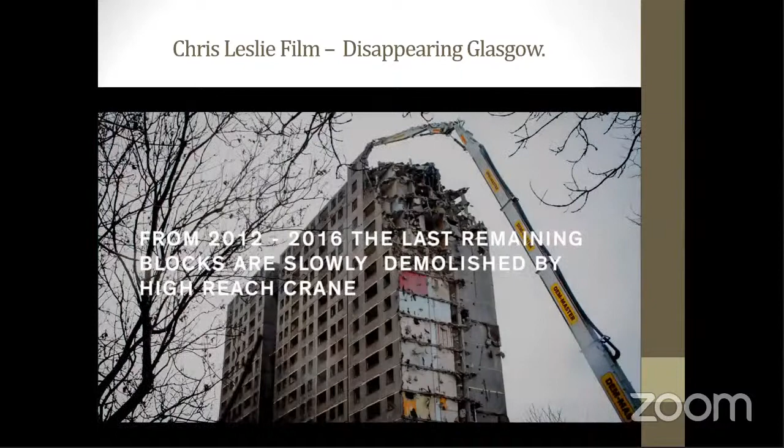Things probably started to decline when you get into the 80s. For me, a pivotal moment was, and it seemed as if it almost happened overnight, round about 82, being 16, and heroin becoming really commonplace, and folk coming into the scheme who were drug dealers, and your mates getting involved in it, people getting ill because of it.

And then gradually a lot of the old people were dying as well, or moving away into care homes, and they were being replaced, I have to say, with people that were single person households. A lot of unemployment as well. At one point in the morning there was no point in waiting in the lift because they were so busy with folk going to work, and then by the 80s that was not the case, so people were coming and going. It was very much a transient community.

So I think what happened was you ended up with an estate that became very much a sink estate, and that's the way it was looked at by the council. For me, it became crucial to move out of Sighthill once I became a parent. Before that, it was somewhere to put my head. I knew everybody. I knew the good people, I knew the bad people, and I was quite streetwise, but the thought of bringing a child up here was not something that I relished at all.

We had issues with drug addicts in the block, going out into the landing, and there was people in the landing hitting up, and it just wasn't somewhere that I wanted to bring up a child. So for me, the main goal in life was finish uni and get a house elsewhere to get him out. I've got mixed feelings about the buildings coming down.

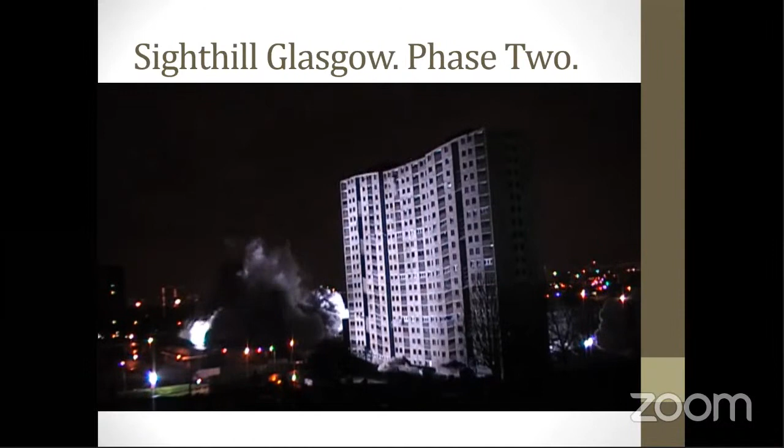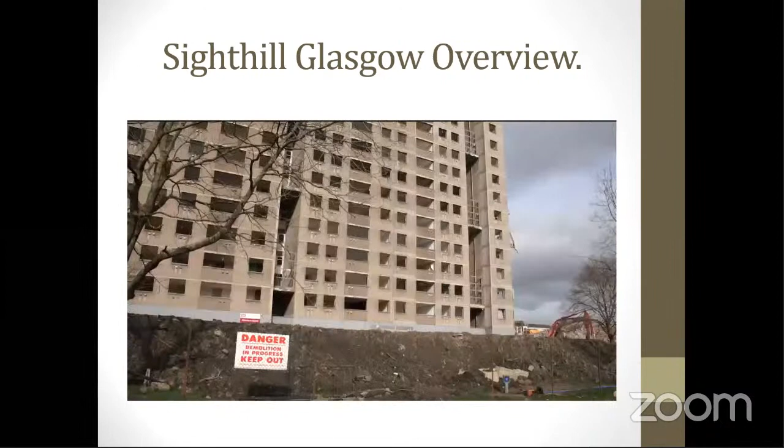The one thing we are good at in Glasgow is making dust, as you can see. My name is Kelly O'Rourke. I'm the Resident Liaison Officer for Technical Demolition Services. Technical Demolition Services have been employed by GHA, who are working alongside Glasgow City Council with the regeneration project here at Sighthill, and we've been employed specifically to take down all of the high-rise flats that have been situated here for many years.

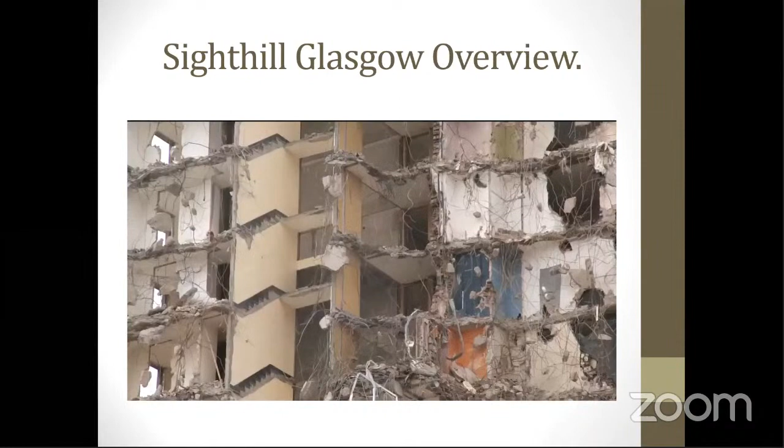Obviously, it's not just a case of when you're demolishing that you just start taking the building down. There's a lot of internal work that needs to be done first. So we would employ our staff to go in and basically gut every single room and part of the building out. This is everything: skirting boards, cupboards, light fittings, smoke alarms, anything at all that we feel would be a danger or a threat while we are demolishing. That is quite a long process, but most of the stuff that we take out of the buildings is actually recycled.

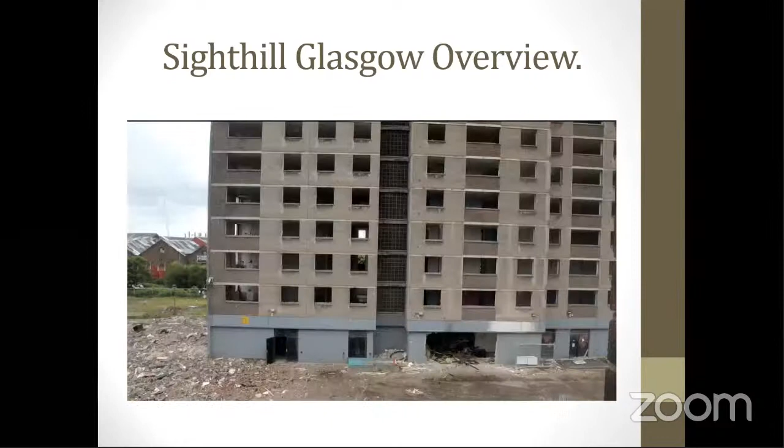The last thing we take out is the windows, and we do that specifically so that when we are taking out everything within the building, we try and keep the dust and noise contained within the building so that we're not disturbing any of the local residents. We're using a method with the super high reach machine, which is one of the largest super high reach machines in Scotland, and basically you work from the top of the building, working your way down in sections, taking chunks of the building out with the jaws of the demolition machine.

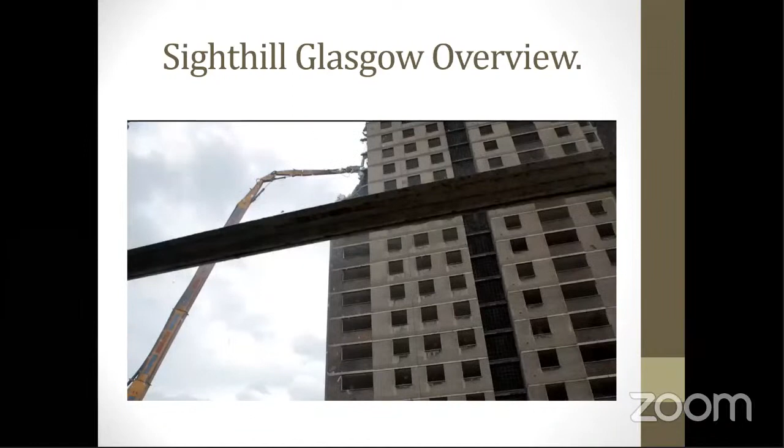Well, my role specifically is what it says, it's to liaise with the community. So that would be the local facilities, the schools which are nearby, church, any of the local residents meetings, any meetings with the local contractors, Glasgow City Council, GHA itself. So I would be a person who people would come to if they have any questions, queries or any issues that they want to raise.

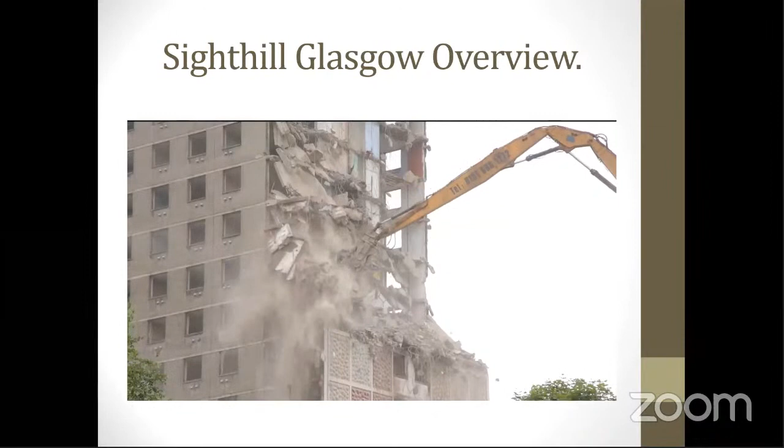We are thinking that demolition work will be completed in October. That will be completely finished here, so that's not just the demolition of the buildings, it'll also be the groundwork which we're employed to do before the other contractors come in. So the initial ones were done with explosives alongside the rail line. As we moved away through the estate, the rest of the towers could then be done with a high reach machine.

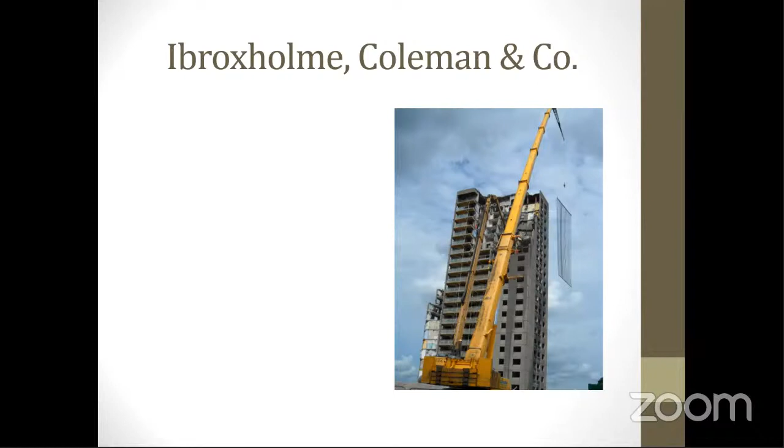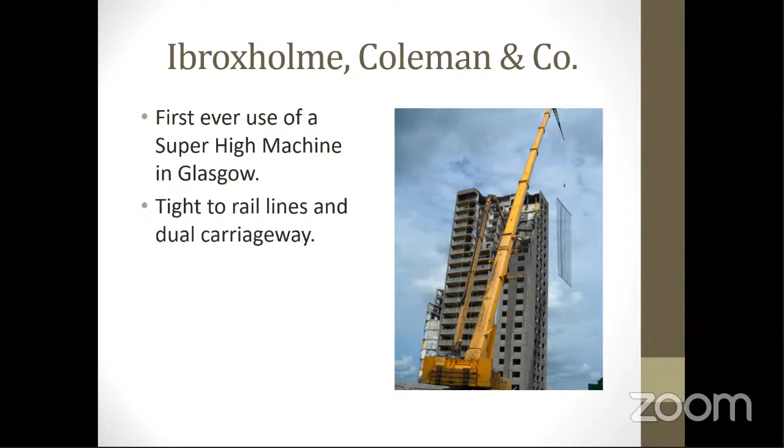And that's really made of light mesh reinforcement, which means that anything that ejects from the side of the building when the machine is munching hits the screen, which prevents it going into the dual carriageway, which was quite close to that. So first ever use of a super high reach. Very tight to rail lines and a dual carriageway, so its own problems which we had to solve. And as I said, the crane's holding the demolition screen.

Stayed with Coleman then to do Riverford Road. This one is again an explosive demolition. The tower on the right of the photograph there, you can see, has had part of it removed by crane and small machine, because of the proximity to a local school. It was within 15 metres of an infant school that had to stay in place. So we took a slice off the building all the way down and then left it for blowdown.

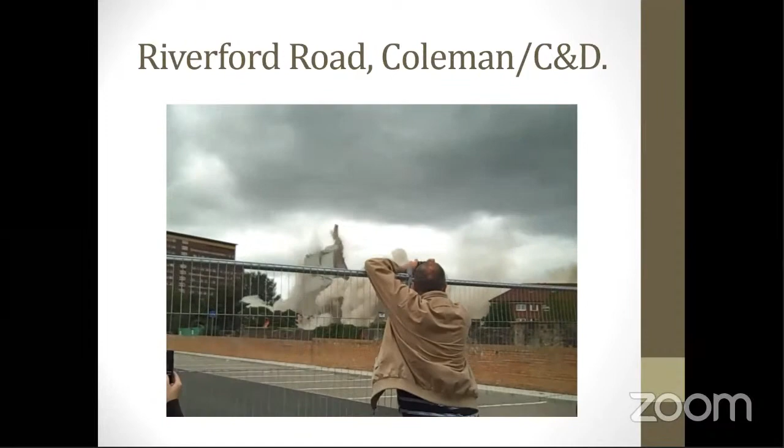Different sort of explosion you saw on that one, a different choice of blasting technique, because those towers had got very heavily reinforced lift shafts in the middle. We then went with high reach when Dem-master got involved with their super high, as well as TDS's super high. This is Demolition Iona Court.

And what we do here is use the high reach machine to munch away. So he's got a jaw on the top of that machine, which pulverizes the concrete. Water is fed up the boom of the machine to keep the dust down, and he just works away nice and steady. The driver has got a reclining seat, and he can look at the TV camera, which is mounted on the boom, so he can see the jaw working on a TV in his cab.

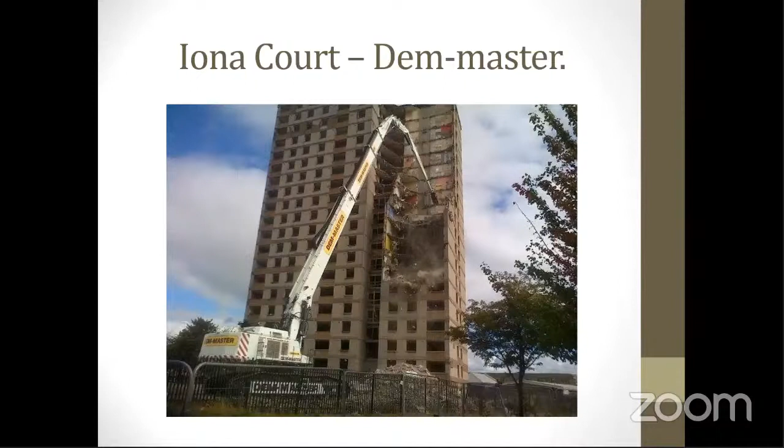But most of the high reach drivers tend to just look up at the attachment working because they're so used to it. And again, you can see there he's reducing it by cutting back to the main shear walls and back to the lift shafts, which is where the strength of the building is.

This is a better photograph of it working. You can see there that the machine can adequately reach that. He's in a good position for that, and the cab of the machine is far enough away that any debris that falls from the tower obviously doesn't fall onto the machine.

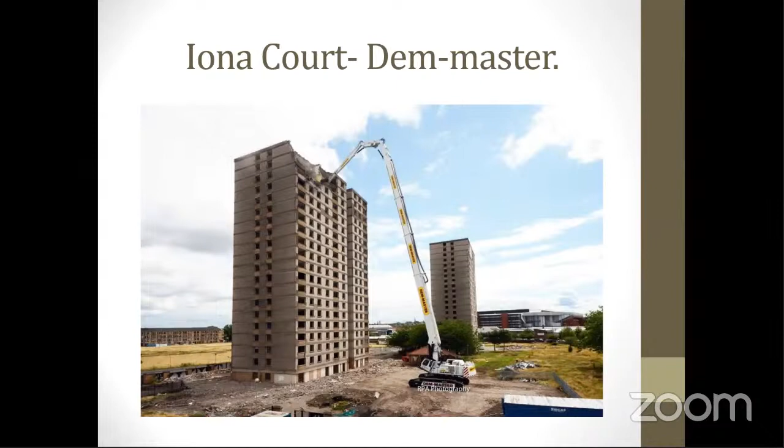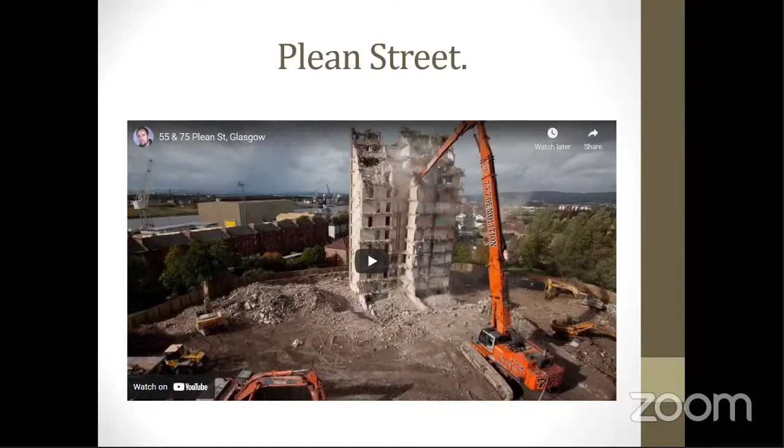On a Sunday, just to walk about with my hands in my pockets. Plean Street, I'm not going to show you this video particularly, but that's a great image of Plean Street. Right by the Clyde, you can see the shipyards on the left-hand side at the back of the terrace houses. And those were up on a hill. So particularly high flats, those. Great view from the top.

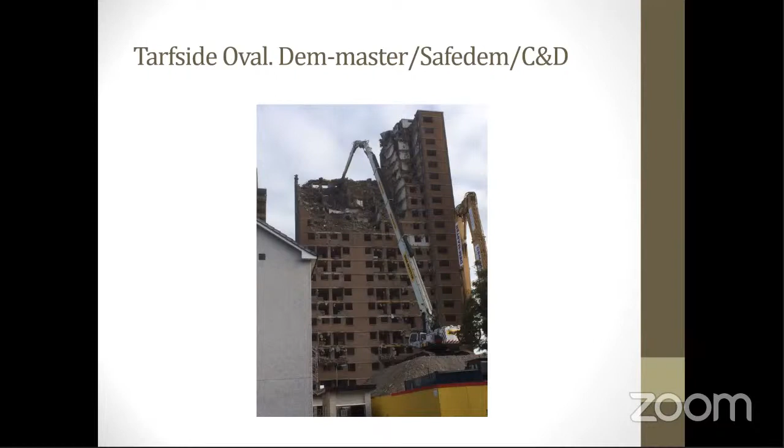Now we got to Tarfside Oval. This one was strange in as much as 4 blocks. One of them can be done by machine, which you can see there in the photograph, so Dem-master's machine working on that. And then 3 need to be brought down by explosives. So again, we've got the block charged on the Sunday and ready to go.

The searches are done and the exclusion zone is cleared. And the helicopter was doing its final pass. The police helicopters have got like a heat-seeking radar. So he was going around seeing if we got anything, and he found a heat source in one of the buildings. They then radio down to us to say we've got a heat source. So from our point of view, we think we've got a cleared exclusion zone, but we obviously haven't, because they picked up something that's alive that's giving out heat.

It could be a person, so we hold the blast cordon and we send the police and the explosives engineer, William Sinclair and David, back in. The police go in with dogs to see what we can find. And as the dogs approached the block, they started barking like crazy, and a fox, which turned out to be our heat source, ran out of the block across the exclusion zone and jumped into the cemetery.

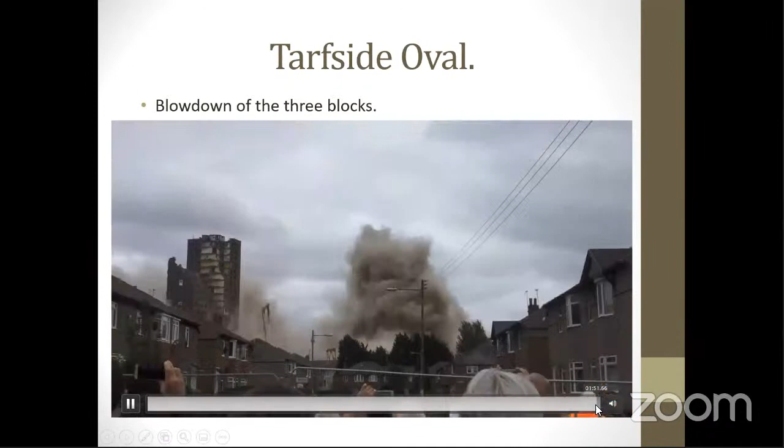So it proves that the heat source radar works because it'll pick up a fox. But from our point of view, we were pleased that it wasn't a person. So blowdown is then back on track. So this is the 3 blocks. So again, that successful blowdown. Now we switch to a different method.

This is the Gallowgate twins. The people in Glasgow always term these as the Gallowgate twins, identical blocks in obviously the Gallowgate area of Glasgow. And these were different from a demolition point of view. The tallest residential concrete towers in Europe, not just in the UK, in Europe.

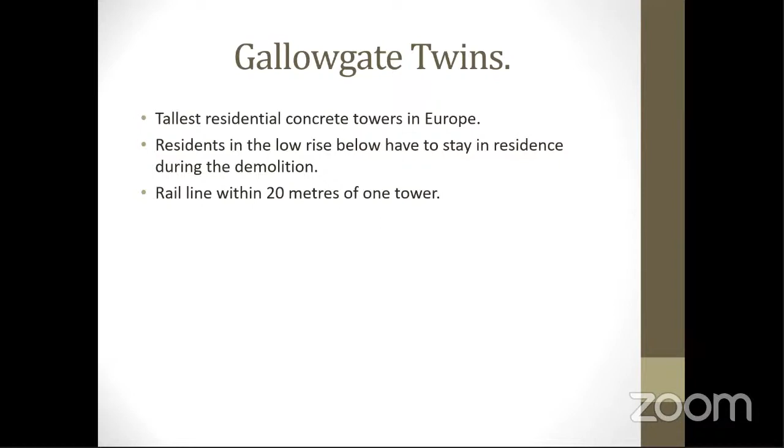The residents in the low rise below have got to stay in place while we do the demolition. Difficulties with the tenancies, difficulties in finding them somewhere else to go. So Glasgow Housing Association was adamant that the residents stay in. And a rail line within 20 metres of one tower. You've noticed by now with this talk that me and rail lines seem to have some sort of attraction to one another. Every time I want to get involved in a blowdown, I've got a rail line somewhere close to me.

Possible methods available: blowdown, no, because we've got residents who have to stay in place underneath us. High reach machine, no, because we haven't got room for the machine to sit away from the block, because if he sat in the correct position, he'd be in someone's lounge. Traditional top down with small machines, no, because of the scaffolding issues. So what can we use?

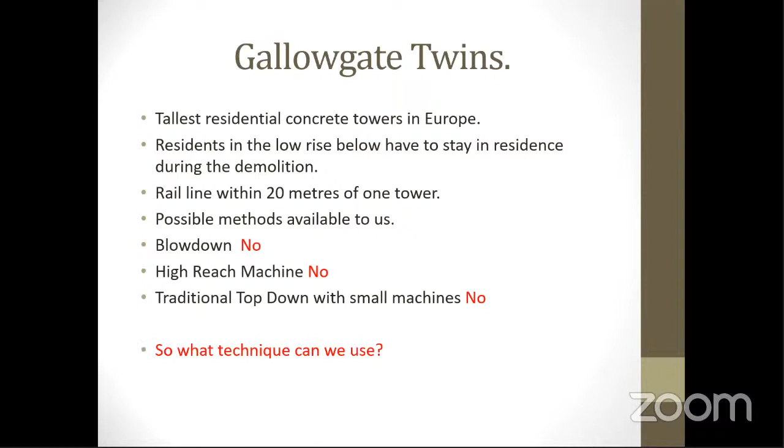Could we use Jenga? Could we pull a section out and bring it down like that? That was a great picture that someone put up at the time when the consultation was going on. Someone within Glasgow put that on Facebook, and I thought, that's brilliant. It's a great idea. We'll just slide it out one at a time.

One of the problems we had with the Gallowgate twins, and which you sometimes have with demolition, is that the drawings that we got from Glasgow City Council as part of the contract showed that we got 26-storey tower blocks. When we actually went to site, we'd actually got 2 30-storey tower blocks. So they designed them to 26 stories, but actually built them to 30 stories. So my comment there is investigate, don't speculate, have a good look. So we've got a bigger block in each case than we thought we had.

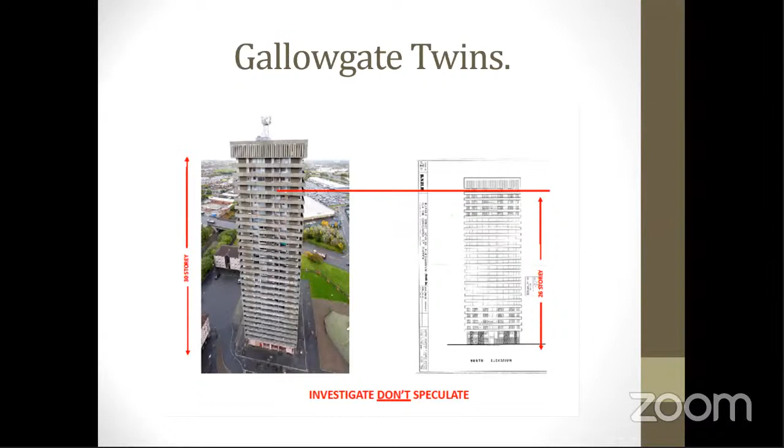After many days of discussion, and I mean many days, backwards and forwards from Glasgow, sitting down, looking at all the options, we decided to use a new technique to the UK called top-down way. This was developed in Italy by Despe, licensed to Safedem in the UK. It's an engineered structure placed on the top of the block that allows demolition inside an envelope. So no noise and no dust. So it's almost like the 2 tower blocks wear a giant shower cap, which keeps everything in place on top of the towers.

We sent an engineer over to Italy to teach the Italians UK legislation, obviously via translation, so that they were up to speed when they arrived. And all the machinery came from Genoa to Felixstowe Port, and then from there up to site.

When on site, we found a local family-run Italian restaurant for the team to use at lunchtime, because the main meal of the day in Italy is lunch. And this simple thing made the lads feel at home as much as they could do. And I think that's what you need to do when people are in an environment that's very strange to them, in a country where they don't speak the language and where things are difficult. If you can give them something that makes them feel at home, then they perform so much better.

We used dual language signage throughout and spent time learning key phrases in Italian and Glaswegian. So the Glaswegians learned some Italian phrases and the Italians learned some Glaswegian. And the best part for me of the system, there's an office on top of the engineered structure, and in that office is an Italian coffee machine. So when you get 30 floors up in the air to see what's going on, you can walk in and have a fantastic espresso.

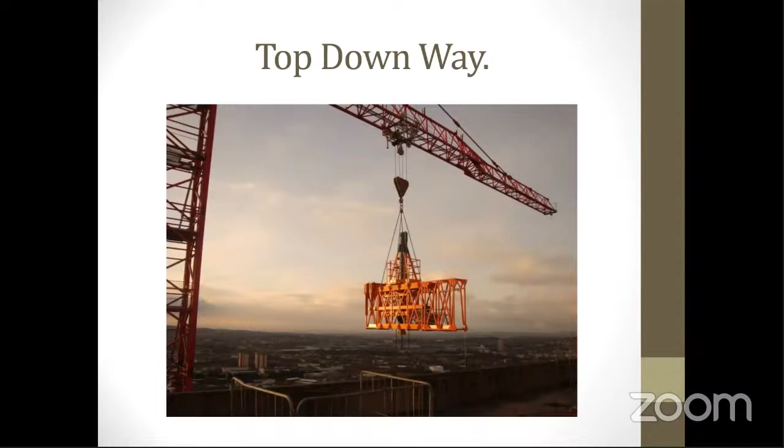So top-down way, a tower crane is erected at the side of the towers, and it lifts up the large structure which we then build on top of it. And that's a great photograph which is off the Despe website, taken from the cemetery the other side of Glasgow, and you can see the top-down way structure on the left-hand one of the Gallowgate twins there.

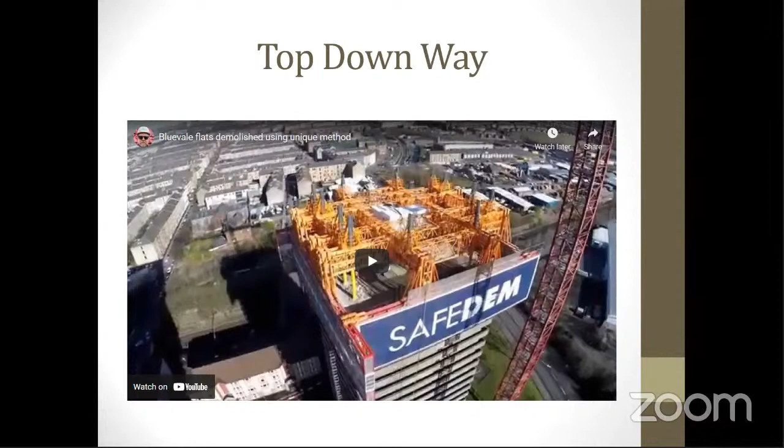This is what it looks like. This is a still from a film by Demolition News. I'm not going to show you the film particularly, but it's a still, and you can see from that, taken by their drone, that we've got this structure on the top. You can see where the SafeDem banner is. That's 3 floors deep on the side there, and there's a rubber seal that attaches that framework to the building, so no dust escapes and no noise escapes. And that's what it looks like when it's actually up there.

And the way that it works is that it walks its way down the tower. So the structure itself is reinforced to make sure it'll take the weight of the engineering structure on top of it. The engineering structure sits on a large number of jacks, and then those jacks are used to bring the structure down. So what we do is we break out the walls of the particular floor we're working underneath the orange structure. We then break out a floor section underneath one of the jacks.

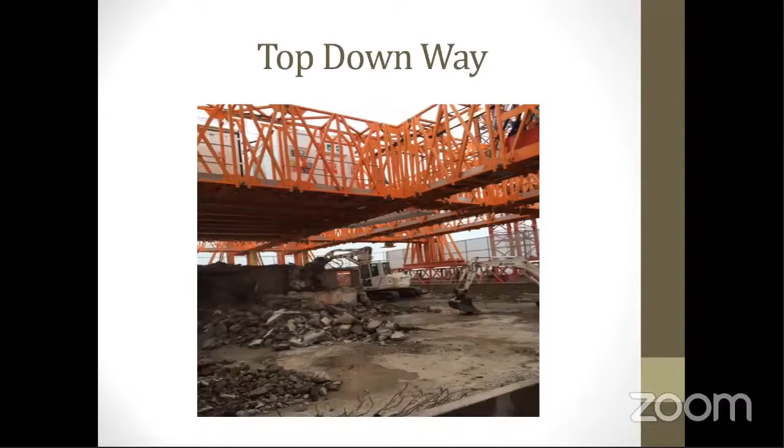So we lift the jack up, we break out the floor where the jack is, and then we lower the jack down to the floor below. And it's suspended on a number of jacks. We move the jacks one at a time, which means it then works its way down. Smaller machines are used, but larger attachments, which means they can do more work up in the air.

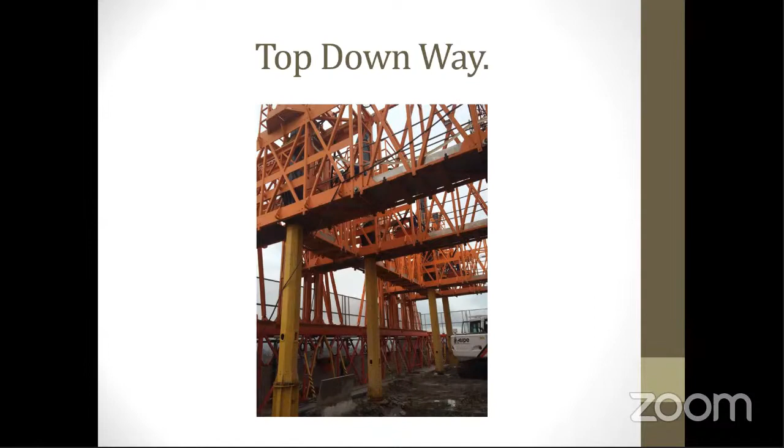And this photograph shows the yellow are the jacks supporting the steelwork. And if you look at those 4 jacks in a line, if you take jack number 2 working from the left-hand side, we would lift that jack up in the air, break that section of floor out, and then send that jack down to the floor below, so that it's always in contact with the structure, but it allows us to walk the framework down. And the machines all work away nice and steady with no noise.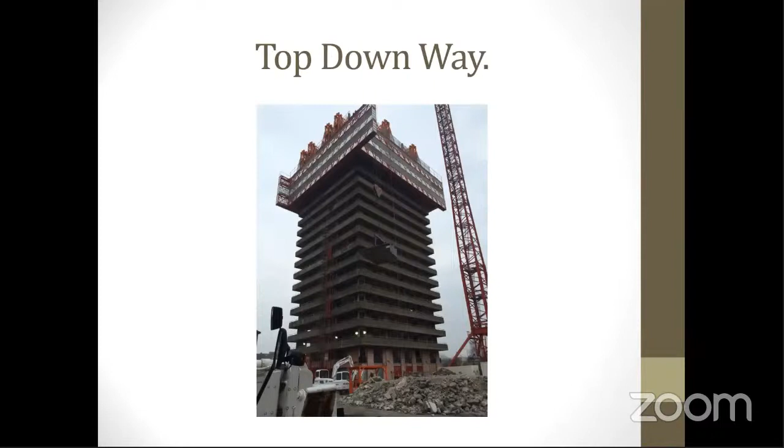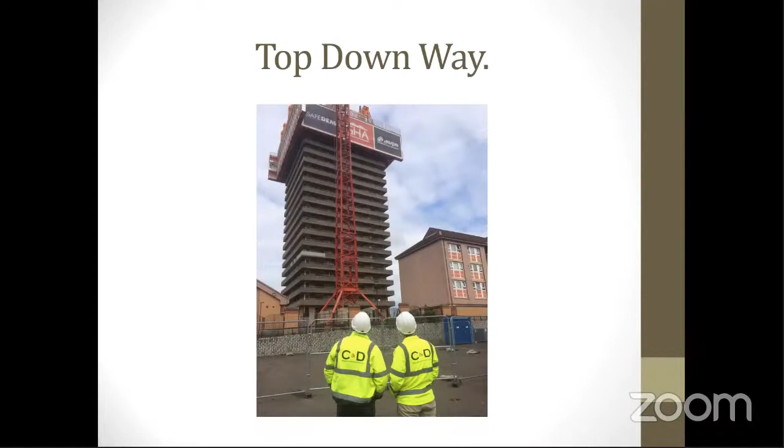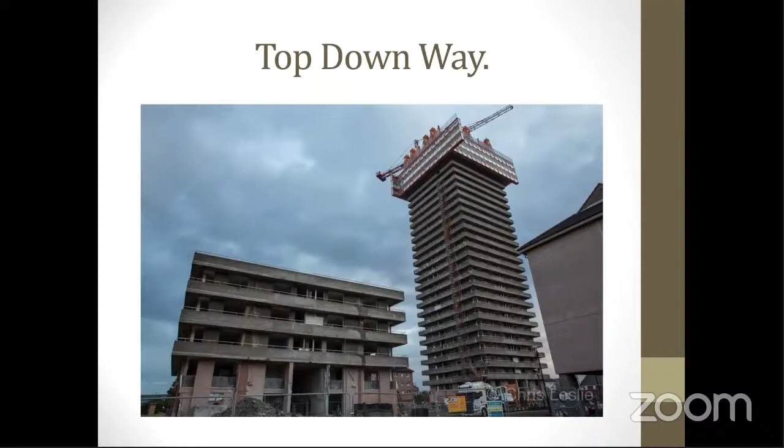We bring it down as we go, and then eventually when we get down to a level such as this one in the photograph, we can then bring in a machine to finish the work. And that's a photograph taken from our old website of Mike Keogh on the left and one of the other guys who works for us on the right, looking up at the top-down way. And a good photograph from Chris Leslie's website. Number 1 is down to 4 stories, and number 2 is just about to make its way down.

So top-down way, safe demolition, no accidents, no noise, no dust. And this is how it works. Oh, sorry, jumped. This is a film taken of the top-down way being used in Lyon in France, but it shows you how it works.

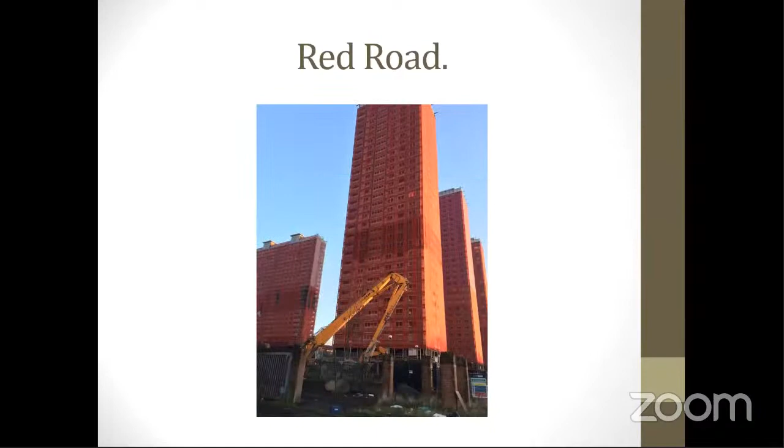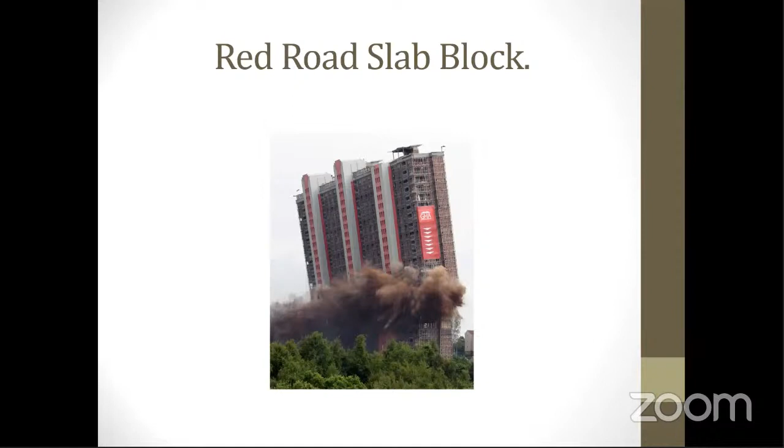Maggie Aderin-Pocock has a slightly more drastic style: demolition. Yes, in the next of her dramatic series of films for the One Show, she's at the Red Road flats in Glasgow, where one of the huge towers is about to come down. Problem is, there's only a matter of metres between the buildings. In the 50s and 60s, tower blocks were hailed as the answer to Britain's post-war housing shortage. Nowhere embraced them more than Glasgow, and none are more iconic than the Red Road flats in Springburn. When opened in 1966, the Red Road flats in Glasgow were some of the tallest residential buildings in Europe. Known as the superblocks, they housed 5,000 people. In their day, these giants were seen as beautiful and futuristic. But today, tower blocks are being brought down around the country. And one block at Red Road is next.

But this tower is not going down without a fight. Blast engineer William Sinclair has found a huge challenge inside. What we actually found on any given floor is a complete mishmash and cocktail of steel columns. Some of the steel we're encountering here is industrial strength, absolutely thick steel. Bringing down a building made from concrete is relatively simple. The shockwave from the explosion easily shatters the material, meaning the building can collapse and implode on itself. A steel structure is so rigid it has to be knocked over, like felling a tree. William's solution is to use two types of explosive. One to topple the steel girders over. This is our bomb box. It's a box with dynamite sticks in there, and that's our kicking charge. That'll actually shift the column out of position. And another type of explosive to slice the steel in two, called a cutter charge. They actually form a molten jet of copper. There's a copper casing with explosive inside, which will actually heat up and physically fire through the steel and slice it like a knife through butter.

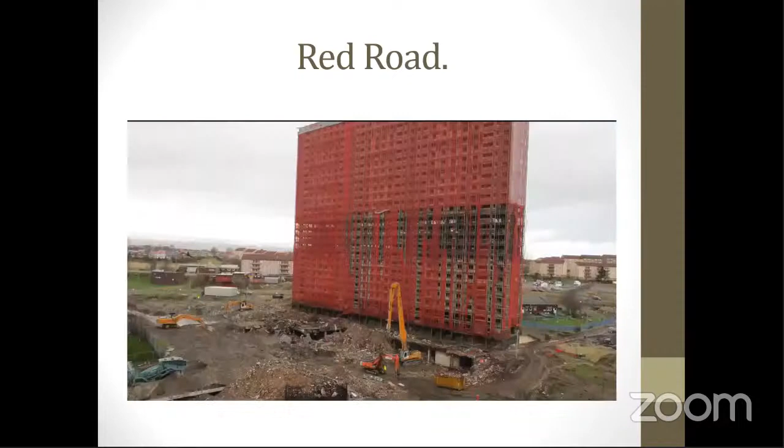We started off, it was for doing the demolition of all the blocks, and once we'd done the soft strip, the asbestos surveys, taking out all the timbers and all the different materials, and then getting them ready for the blowdown. After they were blown down, we had the machines in processing it all, and then it ends up with a finished article with a 6F2, which is left to get used on the site for the new builds.

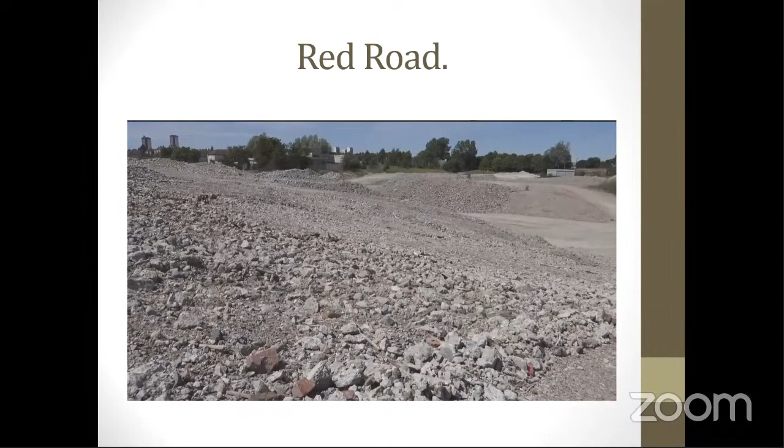I think the starting point was thorough community consultation. Red Road has a strong sense of community here, a sense of community of people that used to live here, if not live in the surrounding areas. Our process started before the demolition of the final blocks, and there was a bit of anxiety, shall we say, in the surrounding community as to how that was going to be undertaken and what was to follow. So it was very important for us to then engage with the local community organisations, shopkeepers, and other interested parties. So that was the starting point for us.

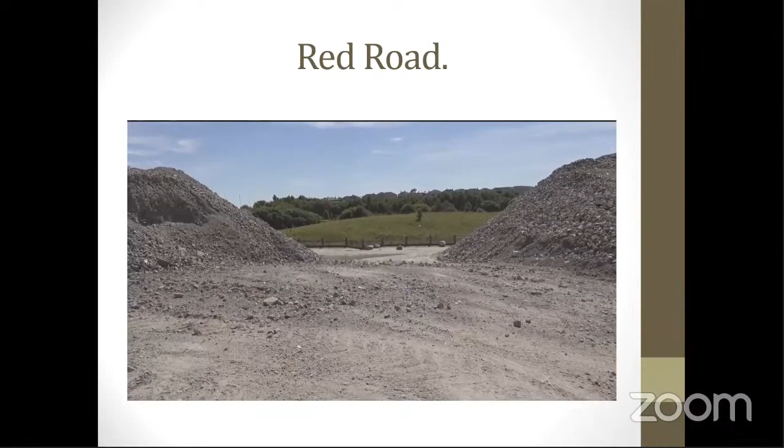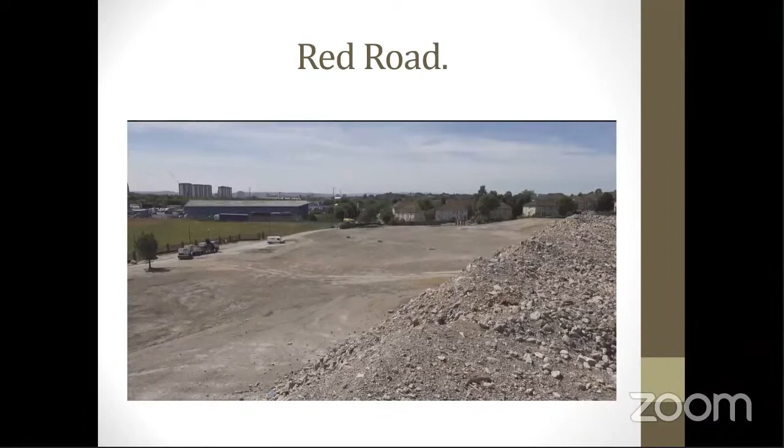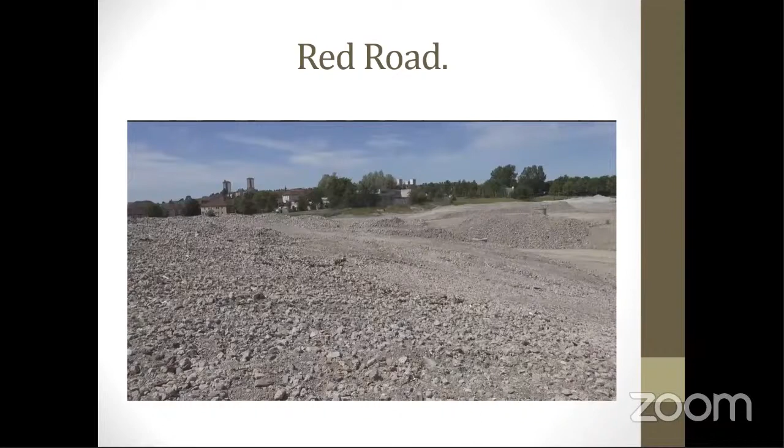The 6F2 is a pile of aggregate that's left in certain parts of the site. It's for when the new build team come in, they use it for piling mats, and also they're digging out any ducts for laying pipes and different processes like that. They just fill in any voids while they're building. The 6F2 actually comes from the concrete, the concrete slabs and the foundations that were in the blocks, and it's to save transporting maybe 500-600 loads off site, for the builders to bring another 500-600 loads onto site, which stops the traffic through the local area as well. That's the idea of it.

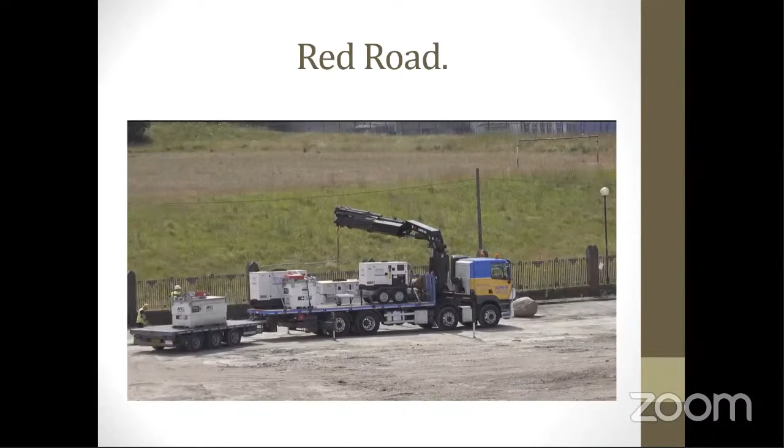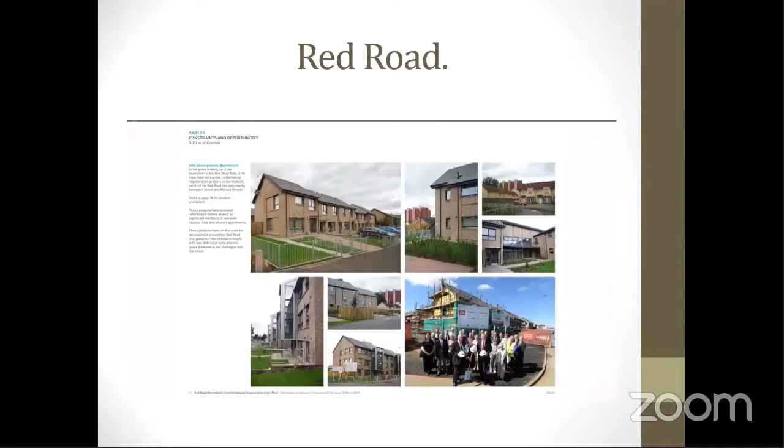The proposals are to, once we've cleared the site, there's a lot of retained material on site. There are certain underground constraints that we need to deal with. We can platform using the existing material. And the master plan provides a framework for providing new homes that go some way to replace the homes that have been removed. But those homes are more family orientated, smaller scale, smaller height, front and back door, homes with gardens, but maybe slightly taller blocks with flatted accommodation on key corners and key aspects of the site.

Community feedback was very positive. Lots of people engaged with this. I think it's true that Red Road is a place that everybody's heard of. The community, the older people in the community remembered when they moved into the blocks. They have fond memories of living in these towers in the sky compared with the damp accommodation they came from.

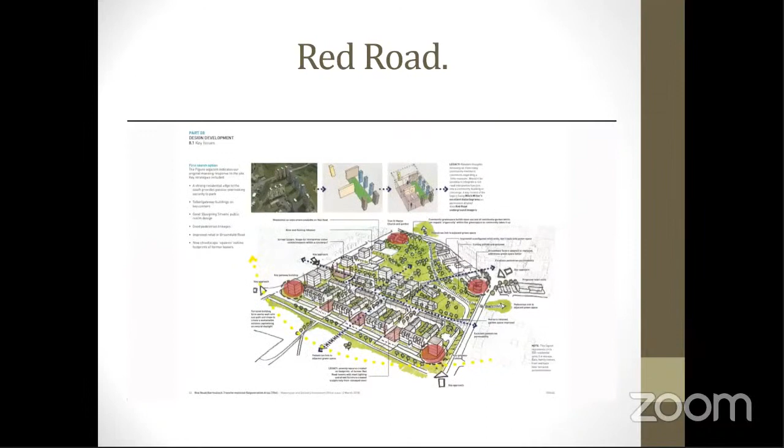But then memories changed through time, because as soon as we proposed removing the buildings and producing something of smaller scale, that we could quite simply change the perception without throwing away the memory of Red Road, and that's what we've striven to do.

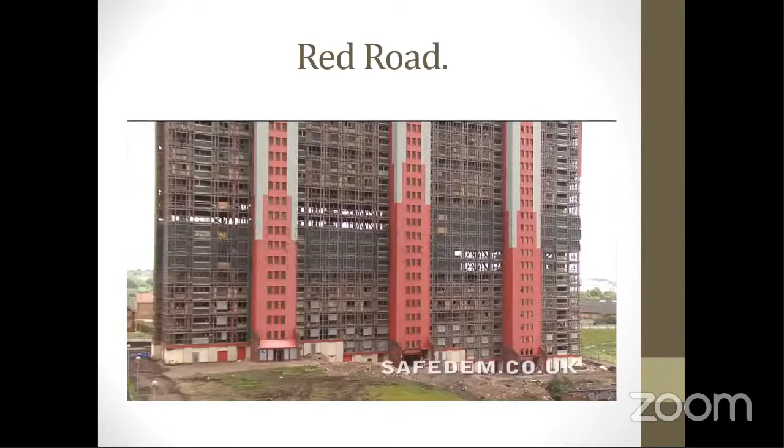With the height and the wind and the outside of the blocks, there's always asbestos cement sheets round it, which we had to strip with the mast climbers. So with the wind monitors, we were actually taking the panels off the side, one full bay from level 1 to level 2, and weighed them. So we knew what weight the men were and what weight the sheets were for working in the mast climbers, so it wasn't overweight, and just stripped them bay by bay coming down, in the wind and the rain and the snow, all sorts of weather.

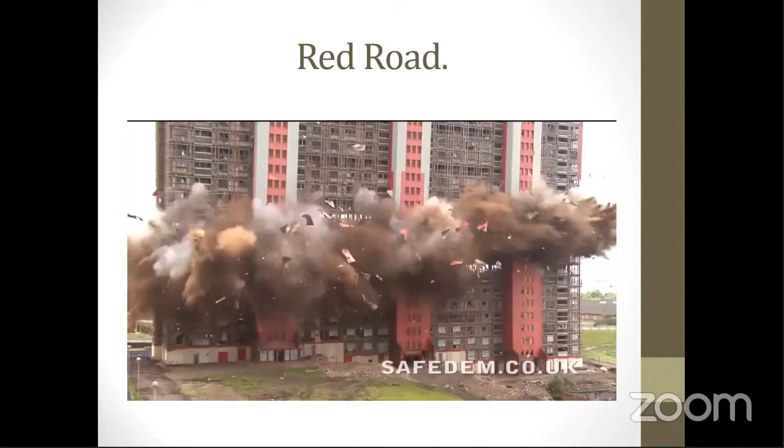On this it was cutting charges, and the charge for blowing it out once it's cut. We need 2 charges, a kicking charge and a cutting charge, and then all the added protection to stop any steel fragments flying out the building.

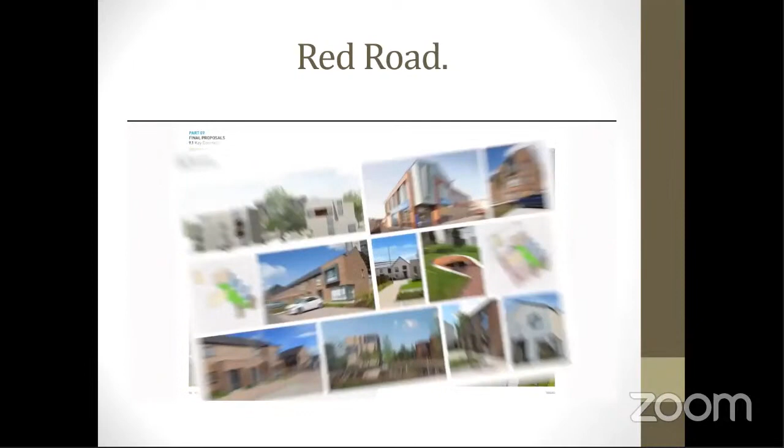The sloping site faces south, so you have an opportunity to orientate your houses to maximise sustainability. Those connections to the surrounding areas allow us to bring in green routes, the wider green network, and create a green heart to the master plan, which we can use as a setting for creating new homes in a significantly different environment from the original homes.

So that shows Red Road as to why it's gone. Well, we're coming to an end now. Apologising for running over, but I thought you'd like to see some of the films being used.

So 14 years working in Glasgow, learning new words like dreich: tedious, wearisome, damp and wet. That summed up the Glasgow weather. And many times I've been soaked to the skin by something that didn't really feel like it was rain, but it obviously was. Scunnered, that's a great dislike. So if they didn't like something up there, they would say they were scunnered. Shoogle, another good one, move from side to side. And glaikit, stupid. That's been used that many times. Unbelievable.

We were helping to clear away the past to make way for the future. And I think that really is the key of what I've tried to talk to you about tonight. We were a very small part of a team that were engaged by Glasgow City Council and the housing associations to remove the flats which were poor from a living standard, so that they can build new modern homes.

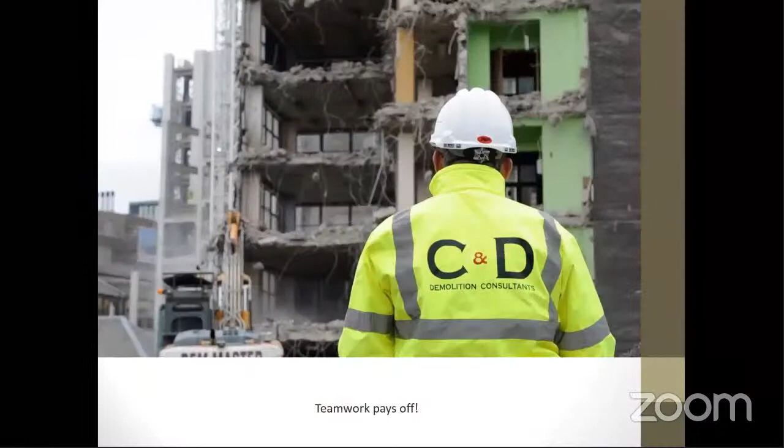Teamwork pays off, that's all I can say. So I know it's probably a bit late for questions. I apologise for running over, but that's it, and I hope you've enjoyed it. I'll hand you back to Ben.

Thank you, John. That was really interesting. It's so interesting to have such a look at something you don't often think about. Buildings come and go all the time, but I can't say I've ever put much thought into not only the technical side of what goes on, but the emotional stories. Really interesting, those films at the start that you showed about how it really affects people's lives and the connections people have to their places of living over all those years. So yeah, thank you so much.